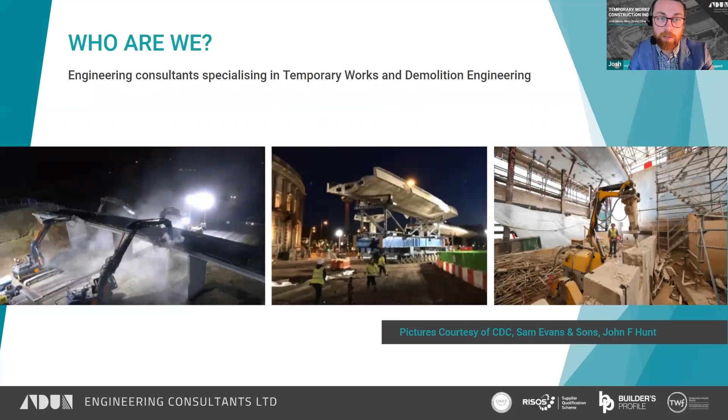So today's topic, temporary works design briefs. Temporary works can be fraught with risk if not planned properly.

Here are some standout examples of large-scale temporary works failures in the last 20 years or so. We've got the Florida bridge collapse in America, the report from OSHA, who are the American equivalent to HSE as I understand it. That's a really great report and makes for some quite worrying reading. There's design errors, also lack of action on site, and then bridge collapse.

So yeah, that's worth tracking down. We've got Gerrards Cross in 2005, a precast segmental arch which collapsed during construction. Nicholls Highway in 2004, large-scale excavation collapse, and Didcot Power Station in 2016, also a large-scale collapse from pre-weakening works.

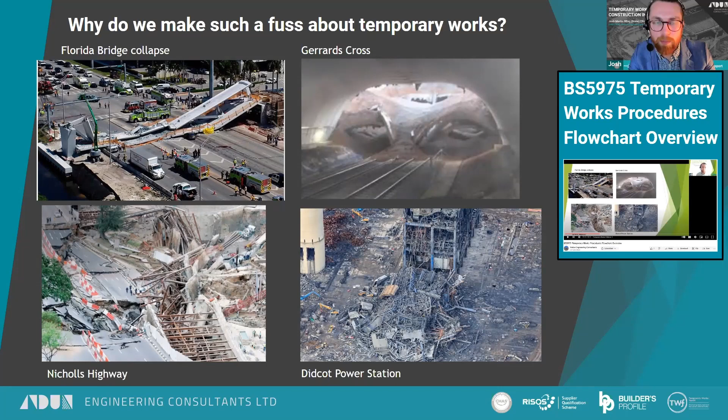We have got a webinar that covers the temporary works flowchart overview, and that covers the procedural control of temporary works more generally, as opposed to these design briefs, which we're focusing in on. So you can see that one on our YouTube channel for a bit more information.

But how long has this been happening? Well, quite a while, and the required control is becoming more and more important as structures that we build become more complex. So if we go right back to 1909 in Newport Dock, here we've got a photo of what's left after the collapse of a large excavation support system. It's a large earthworks failure, 38 were killed, but we don't actually know if this figure is accurate, as they didn't have the same registers as we do today and who was on site at the time. You can see some chaps in bowler hats on there instead of the modern PPE that we have here today.

This is the earliest temporary works failure that's referenced and recognised as such. If we move along a little bit, we've got Loddon Viaduct, which is a bridge just outside of Reading, and it's the construction of one highway bridge in each direction. During the construction of one of the bridges, the falsework failed into the river below, leading to a massive collapse during the pour.

Three were killed during this incident, which was more by luck because it happened on a lunch break and they had staggered the breaks so that there was a reduced number of people on site at one time. Also there are references from those on site at the time who said that as they felt a slump in the deck as the thing started to go, some of the operatives who were close to the bridge that had just been constructed were able to jump across the gap from one side to the other, which is quite astounding, really.

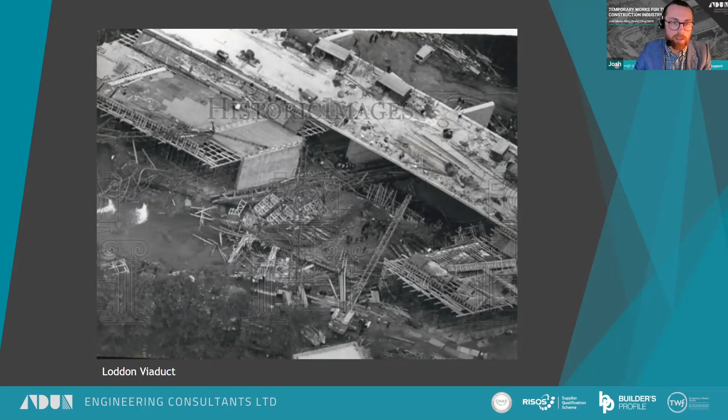During the 50s, 60s, and 70s, there were a number of large-scale collapses that were the results of poorly planned temporary works. And this led to the industry leaders sitting up and thinking that we need to do something to tackle this issue.

And it led to the Bragg Report, which reviewed the failings in the construction industry as it was and identified a number of recommendations, most of which were incorporated into the British Standard for Temporary Works, BS 5975, which we still use today. It's still current, it's not been superseded by Euro norms. Some of those recommendations from the Bragg Report, which you can see was in 1975, are listed here.

So horizontal loads, that's taking into account lateral stability. Again, reviewing lateral stability is lateral lacing and bracing to provide that lateral stability. The use of proprietary equipment and their instructions of use. We've got the 3% horizontal load rule, which is to make sure that the temporary works that we construct is at least stable under some kind of horizontal load.

Discontinuity of falsework beams and jack extensions and the proper use of those. Instructions for the proprietary equipment to make sure that there's good manufacturer's guidance on how it should be used.

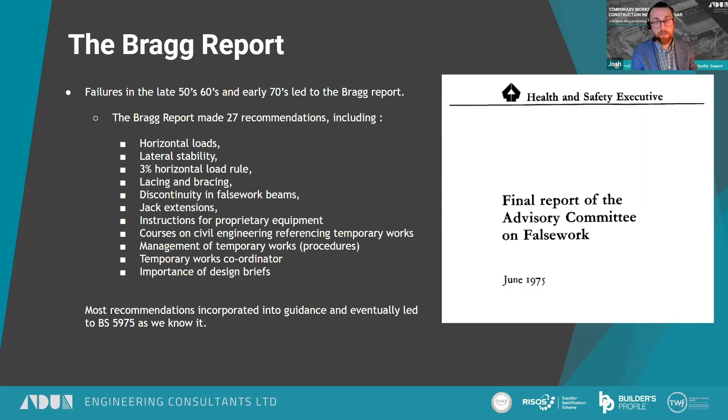Now most construction work is subcontracted away, or with the principal contractor, which is why the CDM regulations play a key role in ensuring duty holders are competent and those appointed plan, manage and monitor their work—in this case, temporary works. The Bragg Report's legacy from '75 is still sending ripples through the industry, still relevant even now with the turn from British standards to Eurocode design.

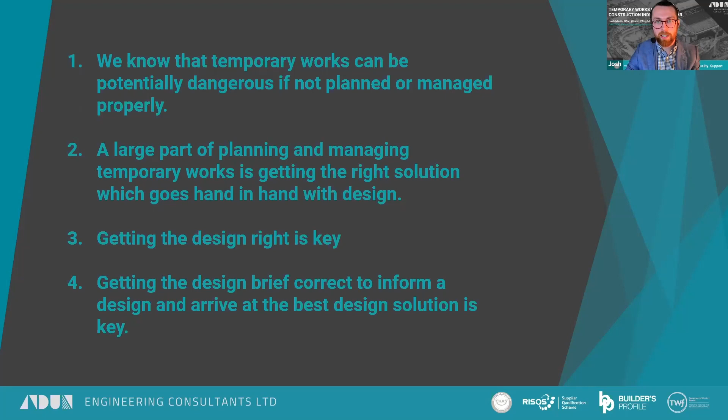We can boil down the importance of design briefs to these conclusions: temporary works can potentially be dangerous if not planned or managed properly. A large part of planning and managing temporary works is getting to the right solution, which goes hand in hand with design. So getting the design right is absolutely key, and getting the design brief correct—which informs the design and arrives at the best solution—is critical to preventing those dangerous situations on site. The design brief is a keystone to that design process, and getting it right is very important.

The design brief comes before the design—shock horror—and can be prepared well in advance, really, once you know what the construction strategy is going to be. It's written by the temporary works coordinator usually, though they can delegate it to somebody else, but it's the coordinator's duty to make sure one exists and is to a good standard.

Once the construction or demolition strategy has been agreed, that's when you know what kind of temporary works solutions are required, and you can start putting your briefs together. We have an online temporary works flowchart which takes you through the whole process from project inception to completion. There's a link here which Chris can put in the chat.

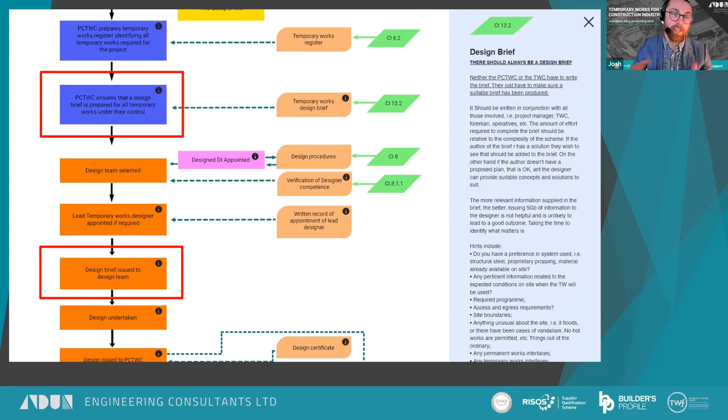I'm going to now hand you over to Dave, who, now we know the history and where it came from and where it sits, will take you through the content of a design brief itself. So over to you, Dave.

We'll start with what 5975 says a design brief should be. The important things are that it will provide the intent of what you're looking for and the information to let us as a designer carry out that design work.

5975 also notes that we should be given enough time to carry that out. So telling us a crane's coming next week isn't ideal for most situations.

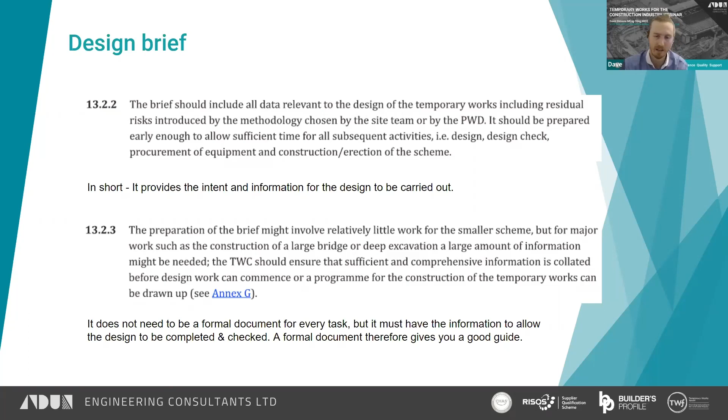It doesn't need to be a formal document, but a formal document gives you a bit of guidance on what to think about and what to issue to us as designers to allow the design to be undertaken. So even for a small job, it's probably worth having a think about it, having a sit down, a look at all the kind of pointers that we're going to go through now, and then get the information together to send out. So Josh, we want to move on.

The due date is also very important. We need to know when you're planning to get this constructed on site. And often we get told yesterday, but a realistic due date is very important.

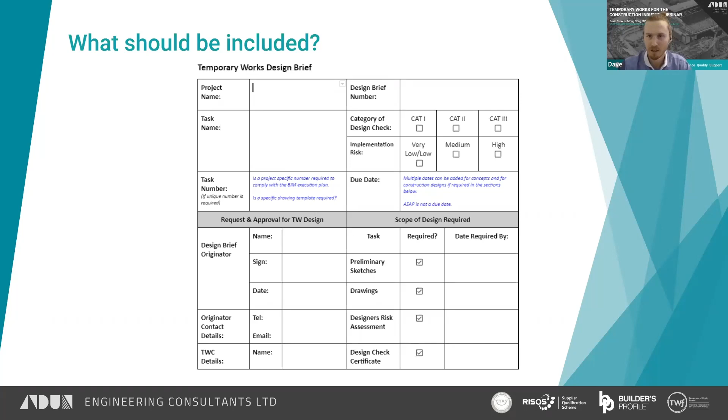Along with that, the category of check - if Josh clicks now, we've got your design categories of checks as outlined in 5975. Cat 0 is essentially a proprietary bit of gear. It's checked by the designer carrying it out, or checked by someone else in the design team.

Cat 1 is it needs to be carried out by another member of the design team. They get to review the calculations undertaken and the design produced.

Cat 2 is in the same organization, but a separate set of calculations should be carried out to prove the design works. The checker doesn't have access to the designer's calculations. They do it completely independently and should be completely independent of the designer.

And Cat 3 is exactly the same, but a separate organization or a separate legal entity carries out the check.

The implementation risk is quite often confused with this, but slightly different. The implementation risk is more to do with how the design or the temporary works is going to be installed, combined with the consequence if it fails. A hoarding in a field is quite different to a hoarding on a railway station platform or in a busy shopping centre - the consequence of that failing is quite different. That's what the implementation risk outlines: who is installing it, how complicated is it to install, and what is the consequence if it fails.

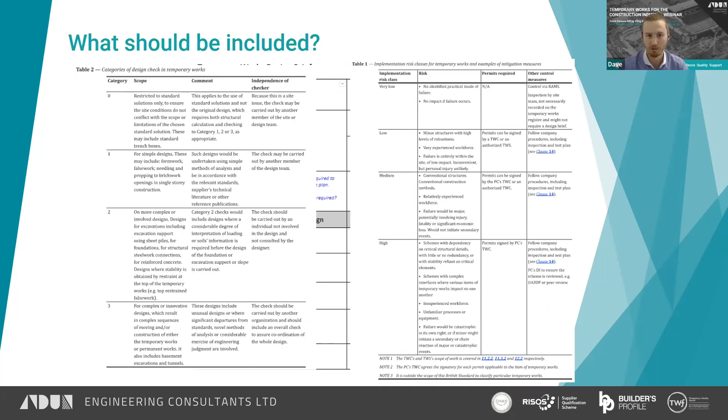Going on, the description of the temporary works required - it's important here to think about what the problem is rather than what you think the solution is. We as designers are quite good at coming up with solutions, but if you can outline the problem, it may provide you with a better temporary works solution.

If you've got a reinforced concrete retaining wall you need to construct, you can specify sheet piling and we'll design sheet piling. But if we know what the constraints are, we may be able to come up with a better solution. Can we use batters? Can we use reinforced earth walls and sequence the job better? There's a lot of options. So it's important to look not just at what you think the temporary works are, but also what is the problem that needs to be solved.

It's also good to know the location. If we've got wind loads or any other loads on the project, we need to know where it is to carry out those calculations. Also, is there a site visit required? Do we need to look at what's there as a designer? Do we need further information?

So that's that. And then we'll look at - do you have a preferred system? This is where you can go with what you are looking for. Do you want proprietary gear? Do you want fabricated steel work? It's useful to know what you are looking for, and then we can take that into account in the design and aim to provide you with what you're looking for - like post in hole hoardings, kentledge based hoardings, give us an idea of what's coming.

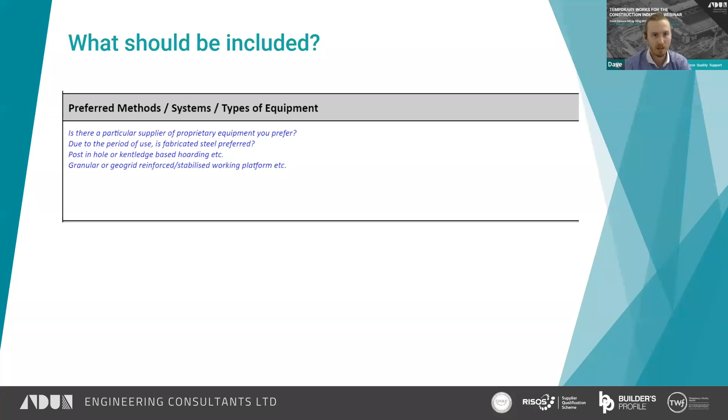Next one is the ground investigation. This is quite often where we get the poorest information.

What we're looking for is some kind of parameters, or something that we can derive geotechnical parameters from. Pictures of a trial hole isn't great, but a full SI report is really good. Somewhere in between is carrying out SPT tests to give us geotechnical parameters in trial holes, or plate bearing tests of a subgrade or formation level, which are also really good. So that's what we're looking for.

Also, with a lot of things, adjacent slopes or excavations are very important to ground properties when we are designing crane positions or foundations for things, because it massively affects the ground bearing capacity.

Next would be the design limitations - this is more about what's around the site. We've got contractual limitations - what kind of contractual issues are around? Are there external approvals required? Is there a party wall award? Is there a network rail asset? Think about what will affect the design. Do we need to carry out Form Cs or AIPs to allow the works to be undertaken, because they add to the timeline prior to your temporary works being installed.

We've got the loading conditions. It's quite often with tower cranes, this is more of an issue, but you'll get a temporary tower crane base with permanent loads onto it, and that really affects what the design is going to be doing. We need to know what those permanent loads are, when they're being installed, and for how long, to allow us to do this. If we're installing a sheet pile wall, do you have a mobile crane behind it coming up in the future? Because that is clearly going to affect the design - it's not just a standard surcharge behind your sheet pile wall.

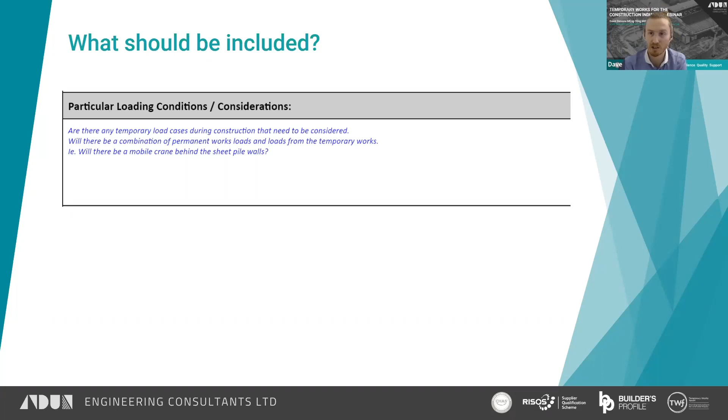And access limitations. So what we're thinking about is, can the temporary works go in and be removed in the same way? If you've got basement propping that's going in and you're constructing a new structure, how will you remove those temporary works, or how do you envisage them being removed?

If you give us an idea of what your construction sequence is, and when the permanent works provide that permanent support, we can then look at how to design the temporary works so they can be removed easily and without causing too much havoc. Then there's the existing underground or overground services that may affect the temporary works. Are there overhead power lines, or chambers or attenuation tanks where you're looking to put cranes? Because that will affect what you can actually carry out on site.

I think that is the end. So to summarize, we need to know what things need to be considered. We don't want just a link to V4P with all of your design drawings - that's not entirely useful, and it's going to waste a huge amount of our time going through them to get the drawings we need that are relevant to the temporary works at hand. Permanent works or historical drawings are very useful when looking at new or old structures to allow us to carry out our work.

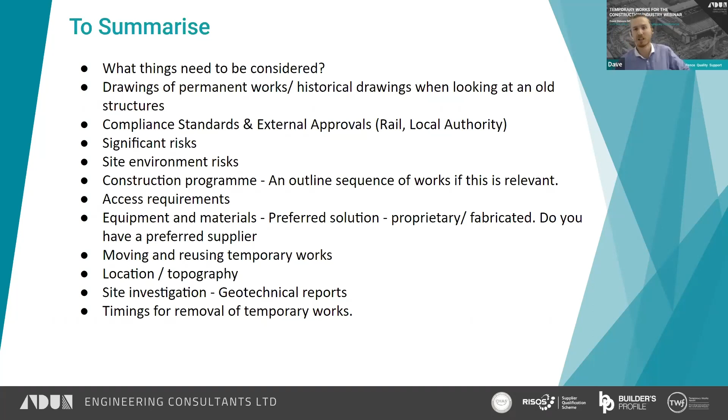As we've gone through - any kind of external approvals required from rail, local authorities, significant risks due to the design of the permanent works or the area around the site, and environmental risks as well come hand in hand there. An outline program of what you intend to construct and when, and the access requirements. If you have preferred equipment, would you like to move or reuse your temporary works? Location is essential for wind load assessments. And then, geotechnical reports and the timing of the removal - those are the headline things to consider when producing your design brief.

And what does that allow us to do? It allows us to solve the problem you've got, and design something that is appropriate for the reason you're looking for temporary works, essentially.

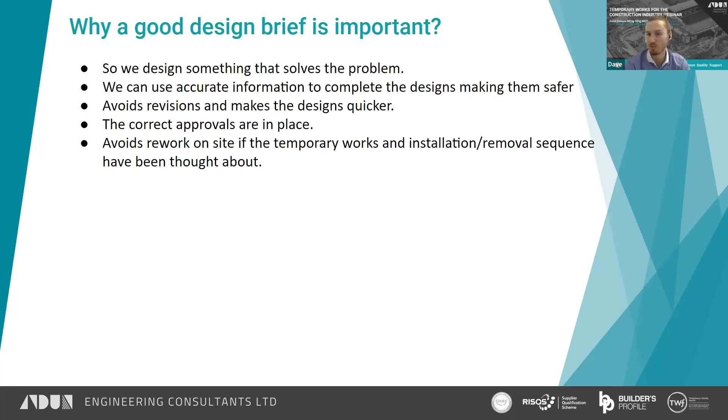We can use accurate information to make the designs better and safer. We can avoid revisions and get the whole process completed more quickly to the timelines required, because they are often urgent. Ensure the correct approvals are in place, and avoid rework if things have been installed or designed without the removal of the temporary works considered, or the new permanent works considered. It avoids rework on site, more cost, more people at risk.

If we get garbage in the design brief, we quite often do not produce the best designs. We need that good information at the start to provide the designs you are going to be wanting, or the best design for your potential problem.

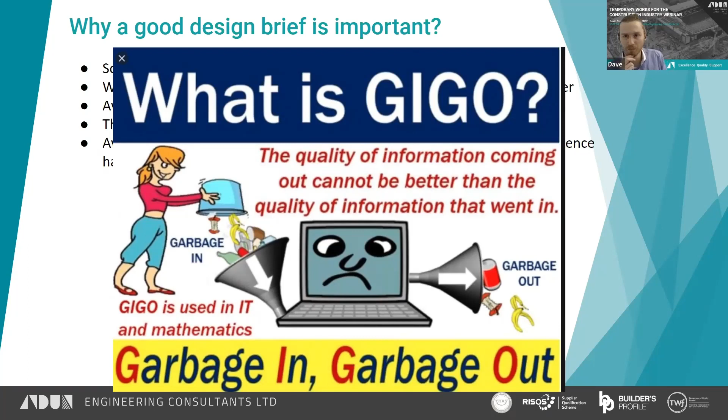So now I'm just going to go through - it's a fairly fictional project, but what we would consider to be good information for a simple kind of crane position. I've gone through here, if Josh can just move on to the next slide.

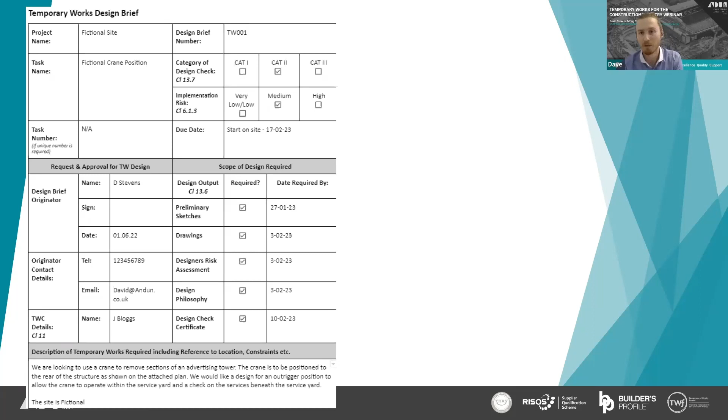Crane position, who's designing it, dates required, a brief description of what they're looking for the crane to do. It's there to remove an advertising tower, to be positioned here. We'd like the outrigger position designed, and for you to check the services underneath the outrigger position to ensure no damage is done. So it's a fairly simple design brief. It's a crane position, but what's interesting is that for a crane position, you need quite detailed ground information.

So they've gone with their preferred solution. If they need extra load spreading, they prefer timber Ekki mats. They've attached some SI, stated which borehole is closest, and then provided construction drawings on what the service yard at the rear was made up of, as well as notes regarding previous work showing that the geogrid wasn't installed. So it's a makeup of concrete slab on type 1 with no geogrid. That's really useful to us to allow us to do the design.

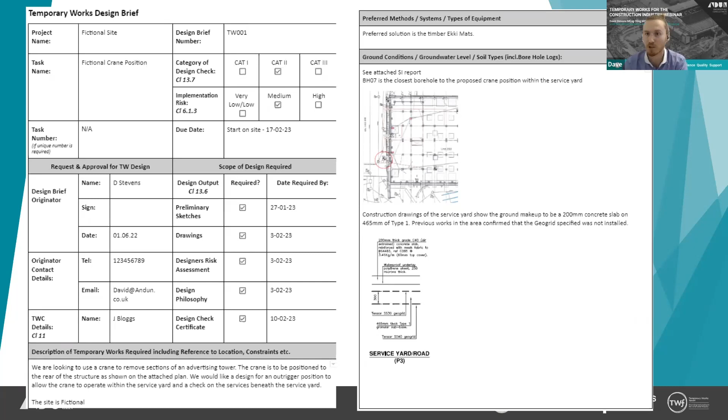They've stated it's not near any network rail assets. It's going to be done as a contract lift, and the imposed loads from the crane, which is being supplied by the crane supplier, along with the standard mats that the crane supplier will be bringing with them. So that gives us a good starting point for our outrigger design.

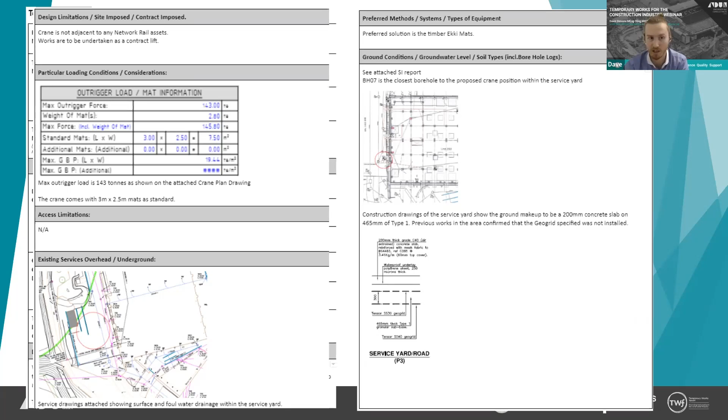They've then also attached some service drawings for the crane location, along with pictures where in previous works they confirmed that services were both there and at the depth shown on the service drawing. That's really good, that's what we're looking for. And then they've attached all the information they've gone through in the design brief. So that's what we are looking for.

It doesn't have to be a huge amount of work to produce a design brief. You just need to think about what information is required for the design. It may be useful to talk to the designer, or your proposed designer, prior to starting this, so that they can inform you of what they would be looking for. We're happy to take phone calls on designs and think about what we need before we start, just so we can give you the information and therefore you can give us the information.

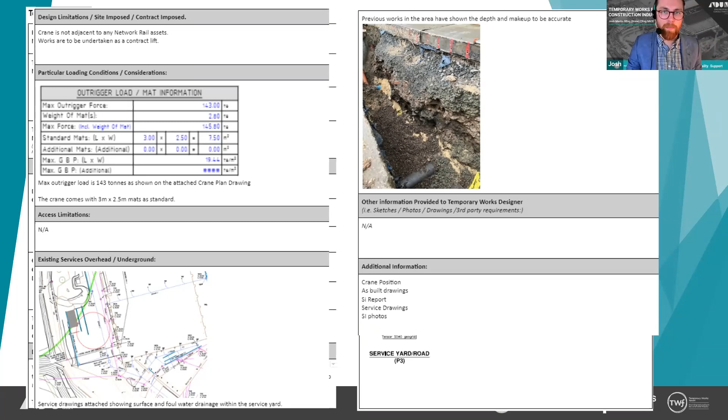So I've got my little case study, which I'm going to talk about on the process of a design brief creation. This project is Old Granada Studios in Manchester. The principal contractor was Bowmer and Kirkland, and we were the temporary works engineers for the project. So I'm going to focus down on a little part of this project and talk to you about what the problem was.

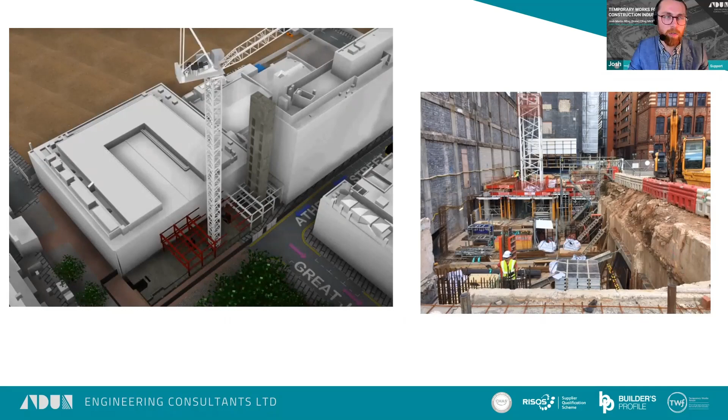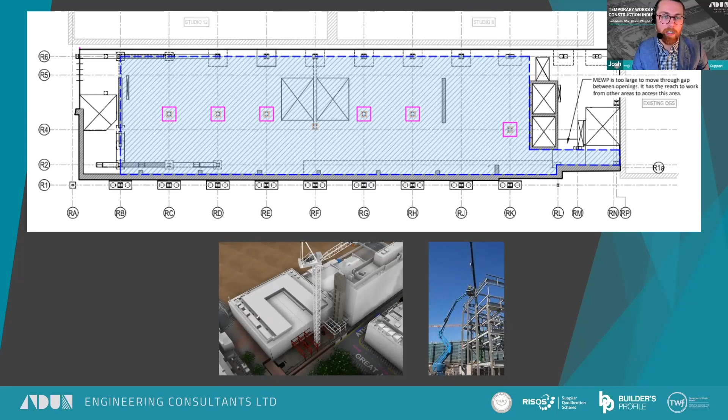So the task was to erect the steelwork frame whilst operating on the ground floor slab, which was a raised element of the structure. The tower crane was being used to handle the steelwork into place, and then a couple of MEWPs were required to enable the fixing of that steelwork. So the problem was that we needed to get plant onto that ground floor slab to operate, which was a temporary works item. So let's go through the design brief example here.

So we've got the project name and task name. This particular project had a BIM execution plan, so we had a specific task number that we needed to reference in drawings. The design category check, I've ticked a couple there because depending on the size of the machine or what's being used, it might well be Cat 2 or Cat 1. It depends really - we carried out a Cat 2 check on this one, but it depends on what's around.

Like Dave talked about, the implementation risk - if there's a particular structure that's a sensitive asset nearby, then the consequence of failure is high. So then you'd want to go for something more like a Cat 2 or Cat 3. So that's open to interpretation really.

If you require a bit of guidance on what that should be, touch base with your designer to scope it out. A 2-ton machine operating there would be Cat 1, but as you get larger machines with larger failure zones, you want to up the independence of the check. Similarly with implementation risk, it really depends on the project, the location, who is carrying out the works, and what the works are.

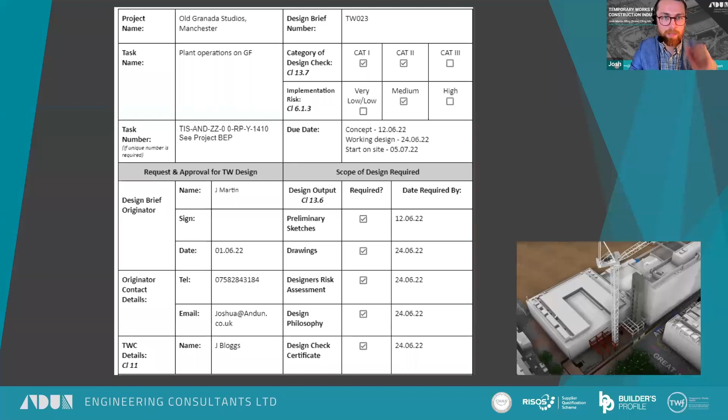The description of the temporary works required: a 15-ton MEWP required to operate on the ground floor slab to facilitate installation of steel from levels 1 to 6, with structural details attached. The ground floor had not been constructed yet at the time the brief was submitted. The MEWP will need to operate over the whole slab over several weeks during the steel erection works.

For preferred methods, the structural engineers stated that the proposed MEWP point load from the wheel is too great, therefore simple back propping to the ground bearing basement slab beneath with Acrow props or similar, since we've got easy access to Acrow props on site. So that's kind of preferred - if we can, we use Acrow props.

The basement slab is essentially the ground conditions underneath any back propping, and the pile design and site investigation report are attached. For design limitations, the MEWP needs to access all areas, so we can't have the design coming back saying you can use the MEWP here but not there - it needs to get everywhere.

Particular loading conditions: the MEWP has an operational weight of 15 tons, see spec sheet attached. The MEWPs will be operating on a live construction floor, therefore the design must consider construction loadings on the same slab as the MEWP if possible - they may well be storing pallets of materials or beams there, so that needs to be thought about during the design. It's not going to be an isolated operation.

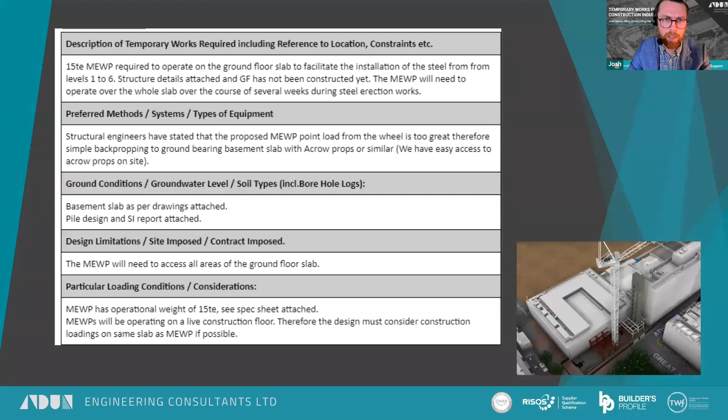Access limitations: the ground floor slab has no access limitations, there's no difference in floor height between them, and no ramp required to get onto the ground floor slab. The basement is accessed via hoist and a new stair core being constructed. There are no services in the area as the structure's just been constructed.

For other information, we've got an attached sketch from the steel erector of the proposed mute positions, and I've referenced what that sketch would be - just a little drawing, and there's no third-party approvals necessary. Additional information includes the method statement, the ground floor slab details, etc. When there's a structure with lots of different drawings, it requires the designer to touch base just to let them know what you require, because that can be quite extensive. So that's my interpretation of what the design brief could be.

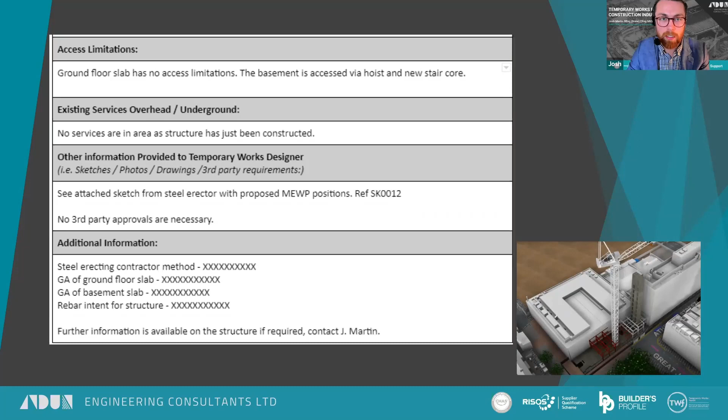On this particular project, we worked very closely with the principal contractor, Beaumont and Kirkland, and were able to plan very early on. The assessment of temporary loadings on the structure resulting from plant such as the MEWP and cherry pickers proved quite interesting. A key item is that the slab hadn't been designed for those point loads, and it also hadn't been built yet - they hadn't constructed the slab.

So is there a better solution to backpropping? Well, yes, possibly. What we looked at, because the slab hadn't been constructed - so in this real life situation - we reviewed the loadings from the various plant and checked that the new slab was designed for bending, shear and deflection.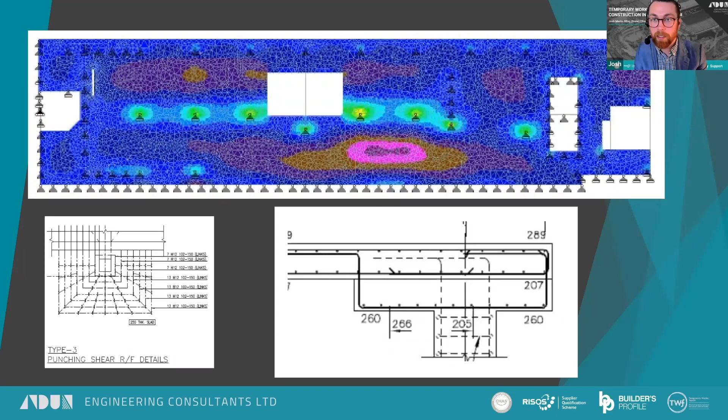And we checked punching shear on the column heads and the column capacity, as well as the loadings into the pile. So we did a full ULS and SLS analysis on the structure. And we concluded that we could get rid of the backpropping if we added additional H12 bars at 300mm centers and installed them in particular areas in the bottom face where the slab was failing, requiring local strengthening to that slab.

Following this conclusion, we proposed and produced this drawing, the proposal being to essentially remove the requirement of backpropping and the associated costs of installation, hire, and removal. But in addition, the basement slab finishing works could proceed because there's no propping in the way, which was a fantastic result, as this solution was very effective in speeding up the program and reducing overall costs whilst also maintaining the required margin of safety.

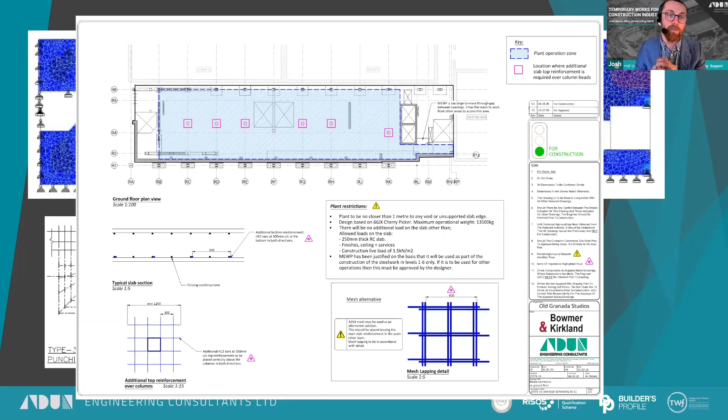But to enable that, it did require some forward planning. So it's a case of thinking ahead and getting ahead of the game.

Hopefully these case studies have reinforced what can be achieved with writing a good design brief. Planning early pays dividends. So in summary, what makes a good design brief?

Providing succinct, accurate information in good time, highlighting risks to increase safety through design, materials available and preferred materials. It's just to better inform the designer of what tools are available in the toolkit that are easily available and effective to get onto site.

An idea of what is expected without leading the designer. This one is key, really. The designers you employ are experienced problem solvers, hopefully, and well experienced in the field of temporary works solutions. So draw upon their expertise on how they can solve the root problem, and not design the solution you've necessarily proposed. It may well be that the solution you think is best is the correct one.

But in my experience, it's best to provide the overall problem in the brief with an idea of what the site team would like to do. It may be that a concept stage is necessary to workshop some ideas, like Dave's example of whether a batter is better than an exclusion zone, or whether you can sequence it and use the permanent works so that you can remove temporary works. That draws out the design stage a little bit, but by planning ahead, it's going to be much more effective in the long term.